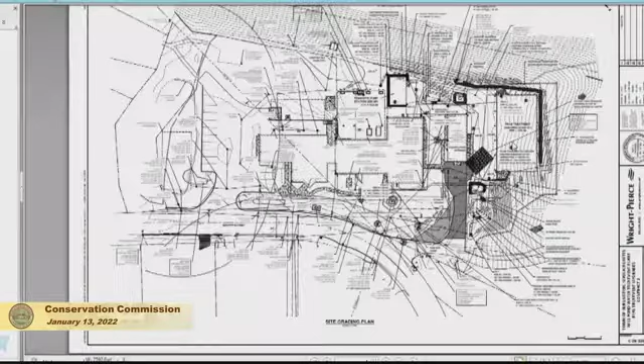Since our last meeting, the only changes we incorporated, let me share my screen. Okay, can everybody see my screen? Yes. Okay, I'll just zoom in here.

The only additional change we did was increase the area of the access way into the proposed site. Here's the PFAS treatment building, and we did that because we're going to have large trucks that need to access this building for media removal and replacement. So to get a truck off the street, we had to widen this entryway, because they have to navigate between this existing structure and the new building.

So we did increase the impervious area here. The stormwater report was updated to account for that area, and a tree box filter was incorporated into the design to accommodate the stormwater runoff from this location, because the grades did not allow us to redirect it to this bioretention area. The description noted there was a swale that feeds the tree box.

Can you point that out, please? Right here, that depression, more or less. Is that in the paved area? No, the paved area is this shaded portion right here. So this is the existing paved area, and we're increasing it in this area, and then the runoff is going to this tree box filter at this location. Okay, and that area with that runoff is a grassed area? Yes, it is.

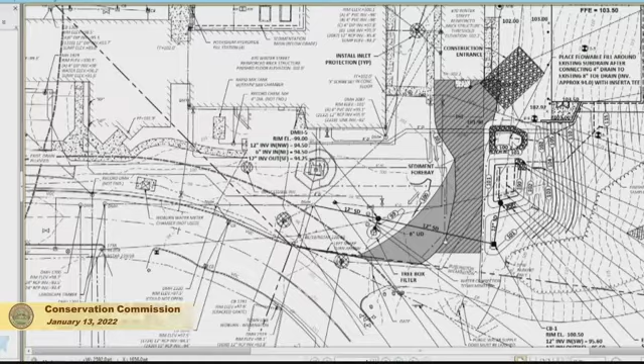Okay, so that describes the changes that we have. Let's see if I had any other notes on this. I do not. Okay, so let's go to the commissioners and see if there's anything else from the staff. No, they also updated their O&M plan to mention keeping up with the tree box as well.

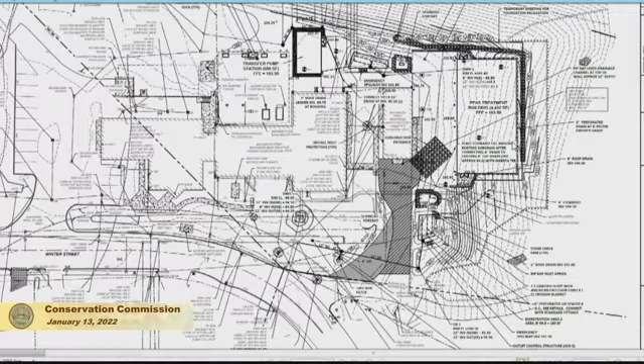Okay, good. Let's go to the commissioners and see if they have any more comments before we close this out. Gail? No, I think they've addressed everything we talked about before. Ed? Nothing to add. Jennifer? Nothing to add, thank you. And Dawn? Nothing more.

Okay, I certainly appreciate all the work that you folks have put into this. It's a very important project for the town, and it's moving along, at least on paper, pretty quickly. So I'm pleased to see that, and I think we'll be happy to do our part. So I think we have answered our questions.

So we need to close the hearing. No other comments? I will ask for a motion to close. Do you want me to go over the draft decision first, before we close the hearing? You can do it either way, either close the hearing first, that's fine. Just in case there's new input coming in, we want to make sure we close the hearing. All right, so let's have a motion to close the hearing, please, on this project to build a new addition to the water treatment plant.

So moved, Gail. Second, Dawn. Okay, let's have a vote, please. Gail, how do you vote? Yes. Ed? Yes. Jennifer? Yes. Dawn? Yes. Chair votes yes. So the hearing is closed.

So now let's go over the draft decisions, and then we can vote on accepting those. Okay, I shared this with the applicant and with Amy earlier. So if there's anything up here where the numbers look wrong, it's probably just because this iteration was uploaded before Amy and I had that conversation. She and I can check in tomorrow about the numbers to make sure everything I have is 100% correct. So it was filed for the construction of a building for PFAS treatment and a building, a transfer pump station building at the existing Mill Pond Water Treatment Plant at 70 Winter Street.

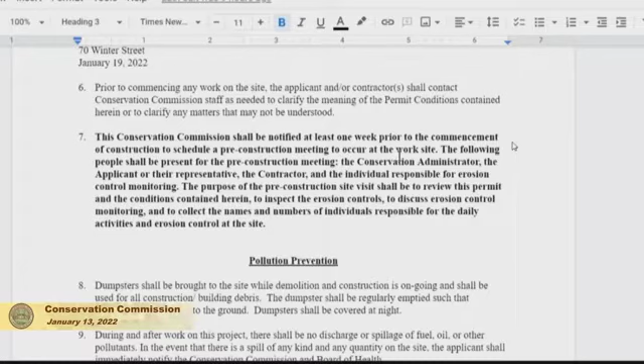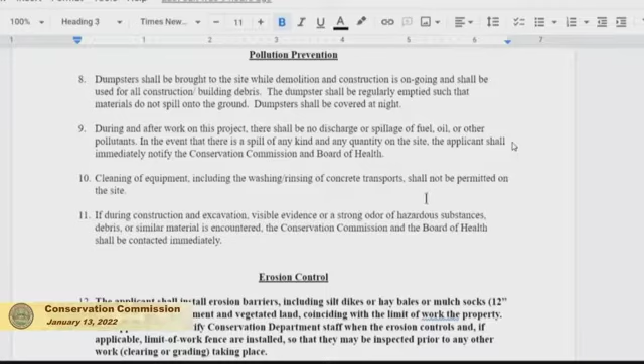The next batch of conditions are standard ones about pollution prevention, referring to cleaning of equipment and no discharge of fuel or oil. The next ones are about erosion control.

The next ones are standard about restabilizing the surface, and material shall not be allowed to run off into the street. Grading shall be completed in such a way as to not direct runoff onto the property of others. Silt sacks shall be required on Winter Street if there's a catch basin within 100 feet. Stone entrances not less than 50 feet long or less than 20 feet wide shall be installed as shown in the above referenced plan.

We will require a weekly written report to the Conservation Department referring to site inspections. Then the next batch of conditions are all about stormwater management. Rooftop runoff shall be infiltrated on site per the reference plans.

Any soil pits must be witnessed by the Board of Health. Installation of all drainage structures shall be witnessed by a PE. The property owner shall adhere to the operation and maintenance plan which they have provided, and the property owner shall submit maintenance records to the Conservation Department.

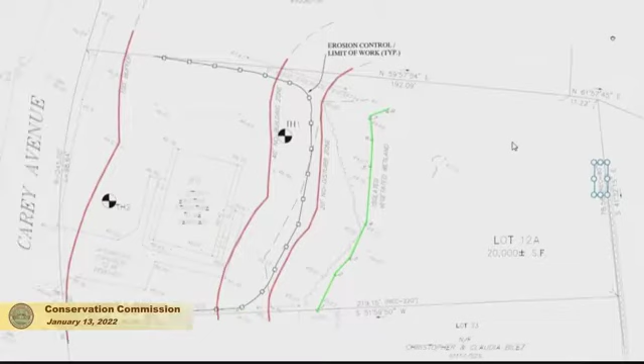The homeowner would like to raze the existing dwelling and construct a new dwelling with a porous driveway and an attached garage. There will be a porous walkway that extends from Carey Avenue to the front entrance of the dwelling and a proposed front porch. There's also a deck proposed off the rear of the dwelling. Minor site grading is proposed for the new dwelling of less than 1 foot.

So the dwelling and the walkway and the driveway, that's all located within the 100-foot buffer zone. No work is proposed within the 40-foot no building zone except for a portion of the minor site grading of less than 1 foot. So all work will occur within the existing lawn. There's no trees proposed to be removed - just existing lawn, the existing footprint of the house, and the driveway.

We are proposing erosion controls along the limit of work to protect the wetland, and to mitigate for the increase in impervious area, we are proposing stormwater management. I'll go ahead and pass the torch off to Pedro, who can describe the stormwater management design for the house for you all. Okay, thank you very much. You're welcome.

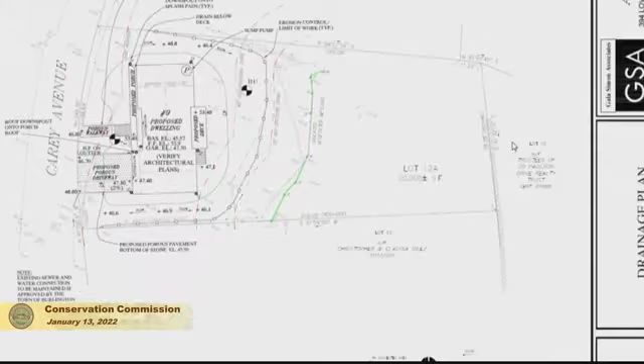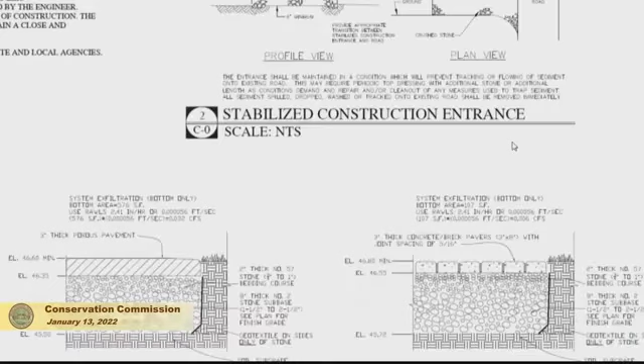Okay, Julia, thank you so much for going over the numbers. About the proposed porous driveway, we're open to suggestions. Instead of making a pavement and having the issue of it being clogged, we could use porous pavers like we're using on the walkway. We have the detail on our drainage plan. Julia, go roll down a little so it can show the commission the detail - that's the porous pavers walkway and could also be the driveway. So instead of asphalt, we have these pavers with small openings of 3/16 inch joint space, and that could be a solution.

I don't know what your thoughts are. Yeah, that would be great. We can certainly change that detail in our plan and get rid of that bituminous porous pavement, and just apply the porous pavers for both walkway and driveway.

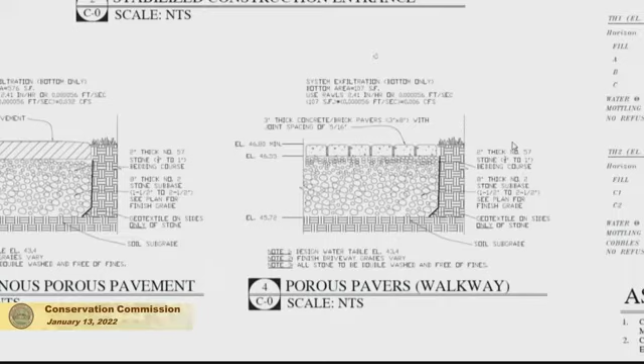Excellent. Pedro, how about my question on how the roof runoff is split between the two sources, one going onto the pavement and one off to a downspout? Yeah, so we had to infiltrate around 200 square feet of the roof, because we're comparing it in our hydrological model.

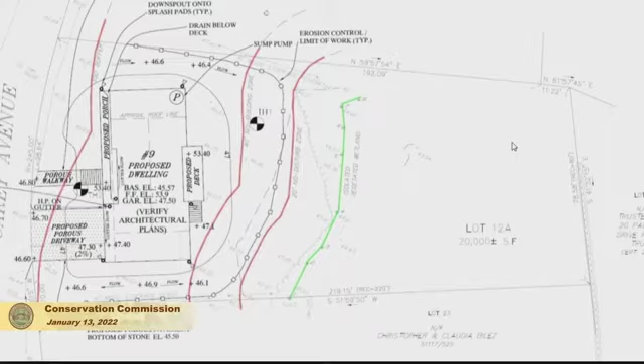Roof downspout onto the porch roof - we're going to direct the porch roof outside to the other corner, so we won't have another portion of the roof going into the porous driveway. Only the bottom left downspout goes directly onto the driveway. That downspout captures just a small portion, excluding the porch and a bigger portion of the house - it's gonna be around 200 square feet of infiltrated area into the porous driveway.

Okay. All right, any other comments from the staff?

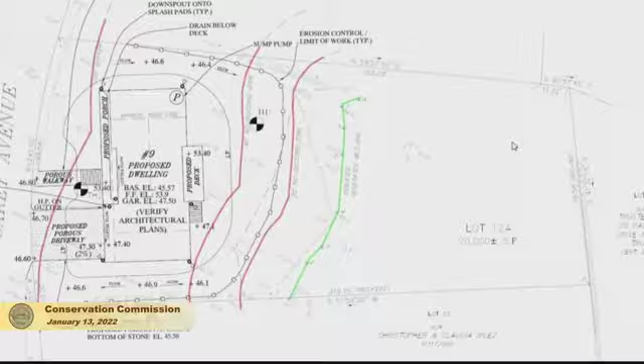All right, next up is item number 7, continued public hearing for a notice of intent, 7 Freeport Drive, Oswin Javeri, construct a residential addition, DEP number 122664. Is someone here for that application?

Yep, for the record, Stevie Cavallo of Farland Corp. Can everyone hear me? Yes. Okay, so we've been before the commission several times with this project. At the last public hearing, you asked for some additional information with regards to the roof recharge systems. We've since provided some of the manufacturer's information, and other than that, there's been no change to the design plan. But if there are any additional questions, I'd be more than happy to answer them.

Okay, thank you very much. You're welcome. John or Arlene, do we have any comments on this?

So the main reason that this was continued was just so that they could address the outstanding issue that DEP raised about whether or not the infiltration system would be able to withstand inundation during a 100-year flood, since it's in the floodplain. So they provided information that it's basically a system designed to be under parking lots with a lot of weight over them, which seems to me more than enough for this application. Very good.

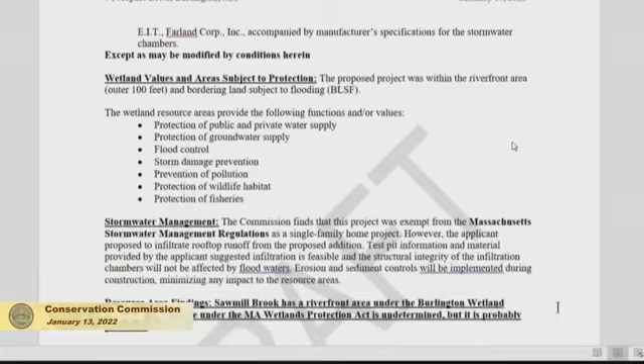Filing history. Let's see, I'll go down to the resource area findings on page 2. So this is in the riverfront of Sawmill Brook, which under our bylaw has a riverfront area, and its status under the Wetlands Protection Act is undetermined at this point.

The commission's finding that the work within BLSF, bordering land subject to flooding, will meet the performance standards because the addition will be built on pilings and the existing dwelling will be retrofitted to allow flood storage under the building, which the current building does not. The addition of the flood vents will more than compensate for the volume of the actual footings in the floodplain.

The commission also finds that the underground infiltration system will not be structurally compromised if inundated during a major flooding event. Other than lawn, no vegetation within riverfront area would be impacted by this project. The applicant will have a condition to cease mowing beyond the fence other than a 4-foot swath as a riverfront improvement.

Then the other findings are fairly standard findings. And the bylaw conditions include a proposal, if you just scroll down, for a bond of, there you go, $3,500.

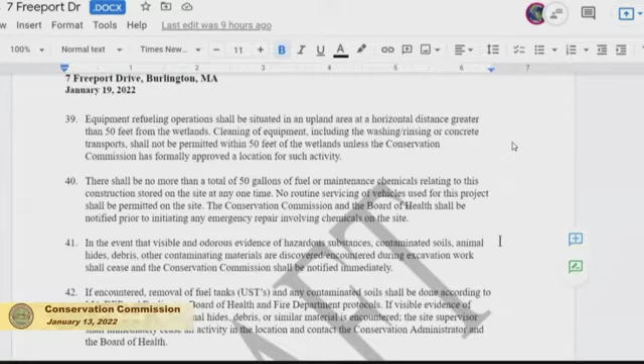And once again, this draft decision was provided to the applicant this afternoon. So if we're going too fast, let me know. But Stevie, we did send it to you. So pollution control conditions are all standard conditions that we always issue.

Stormwater management conditions, 44: runoff from the rooftop and the driveway shall be managed as shown on the approved plans using 2 ADS StormTech SC 310 chambers. So the owner is responsible for maintaining that, and that will be required to be done in perpetuity.

Riverfront area conditions: no filling or change of grade is permitted within the floodplain. The entire lot is in the floodplain. This condition shall continue in perpetuity and be noted in the certificate of compliance. The area beneath the existing house shall be left open to flood water flow through the system of flood vents. The new addition shall be open to flood water flow through the construction technique of having it on pilings. That condition will also be in perpetuity.

Then the area beyond the fence for the riverfront restoration area, 7 native high bush blueberries shall be planted within the limit of work as restoration of the riverfront area. I'm not sure what that means exactly, so I think we want those planted beyond the fence, at the rear of the property, beyond the chain link fence, where except for a 4-foot swath immediately behind the fence, we're requiring that the rest be left to be restored. And then the request for certificate of compliance conditions are standard.

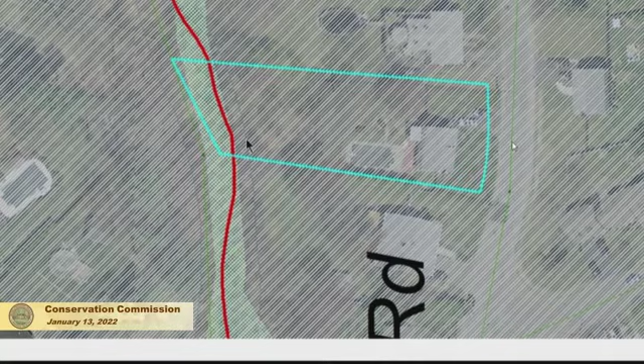John or Arlene? Hi, I will just do a brief one on this. So as Sean explained, this entire site is within the flood zone, and it's also in the riverfront area to a stream. Just going to stop sharing and I'm going to pull up his plan.

So as he explained, since it's all in the flood zone, this makes doing any sort of construction pretty tricky. If you're going to do construction, you need to provide flood to replicate the flood zone, which his architect or engineer had put some numbers in the plan, but he wasn't showing where replication would occur. Let me just get the plan lined up. It's ready to go.

As you can see, he was proposing to build the garage on the right-hand side of the existing house, fully in the flood zone and in the outer riparian. He was proposing to put some flood vents on two sides of the house, but that is not something DEP would allow. So he and his architect are going to have to go back to the drawing board on this one a little bit. My main concerns are that it's in the flood zone, and as designed, it isn't really permissible.

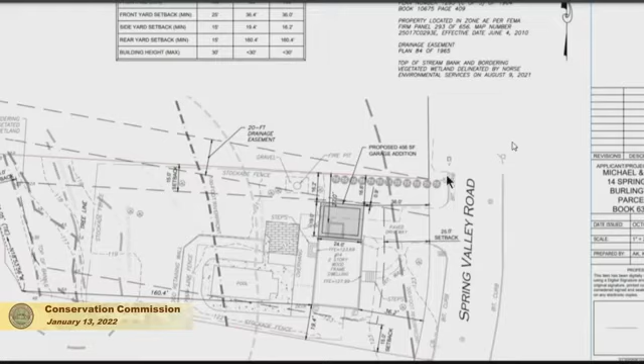Okay, thank you. All right, let's see if there are comments from commissioners. Let's start with Dawn. Any comments, Dawn? No, not at this time. Jennifer? No, not at this time. Ed? No, I'm zipping through the proposal again, but I can't see anything I want to add.

And Gail? Yeah, I think the problem is that by having the foundation, you're potentially blocking any floodwaters. It's a difficult site. If you were to do something here, it kind of needs a redesign where, if you're putting an addition on, it would have to be on footings and not a foundation underneath it, so water could flow under it. And the problem with the design, the openings suggested for the garage part, is that they're perpendicular to each other. They have to be in line with each other so that water can flow right through. And that's kind of difficult with a garage that's attached to a house. So those are the challenges I see.

Thank you, Gail. Yes, Gail's point is correct, that the rules say you have to have unimpeded flow of floodwater through the area encompassed here. And just to be clear, this is not a Burlington rule, it's not even a state rule really, although it is itemized in the state regulations. This is a federal FEMA rule regarding floodplain management. The only approvals we've given for things in a floodplain are for something that is clearly off the ground, like an addition on sonotubes or something like that. It's hard to do with a garage because of the weight of the cars and everything else. That almost becomes a form of structured parking that may not be zoned for your area. So you're really going to have to look at some kind of creative design, or maybe wait for comments from DEP to see what they have to say. But I would be very surprised if DEP said your current plan was acceptable.

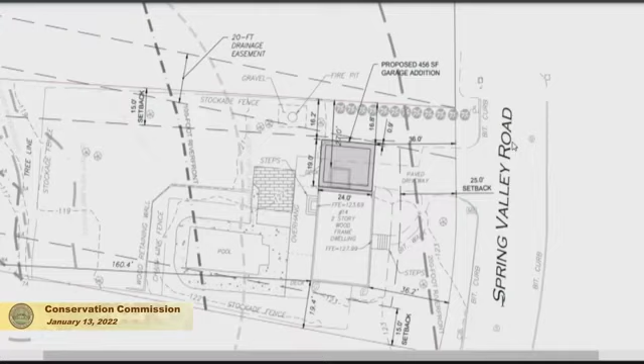If that makes sense. And that's your elevation - the floor of the garage? That's the current elevation of the existing property, and would be the elevation of the garage as well. Okay.

So just for clarification, to bring this back to the professionals, there's a 2 to 3 foot difference somewhere between the elevation of the proposed garage and the elevation of the floodplain, which makes sense. I can bring that information back.

The other thing that was brought up was essentially that a foundation would be poured, like a base for a car to park on, and that would be in the floodplain. Obviously there's a compensatory storage conversation that typically happens, but in my conversations with wetland scientists, 0% of my property is above the floodplain. So there's nowhere I could technically add compensatory storage for any areas I take out, if that makes sense, which again, I've got a lot more questions than answers, I guess.

Okay, no, you're absolutely right. So typically commissions find that the volume displaced by footings is so de minimis that they don't require that volume to be mitigated. If you're putting in 4 footings for an addition or a garage, for say a carport, they may find that amount of flood storage displaced doesn't need to be recreated. But if you build an enclosed structure, that's a lot of volume, and they cannot make that finding. That feedback is really helpful, John, thank you.